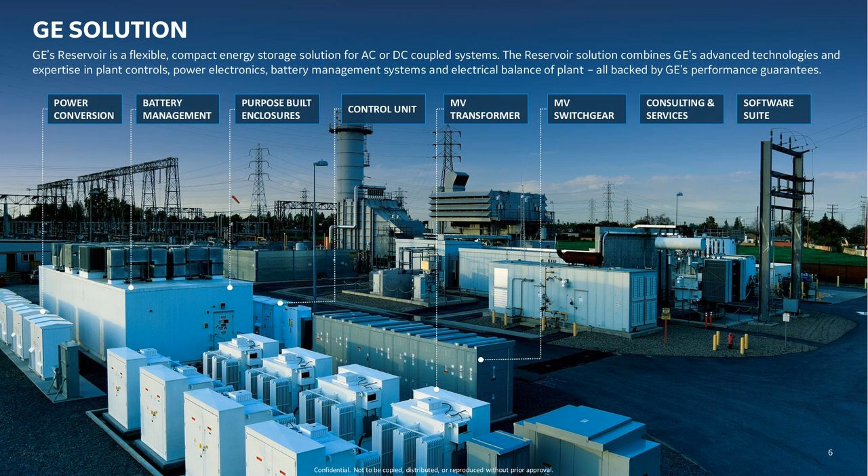And if you go to the next slide, again, not just the hardware, but the whole approach. How do you fit in your particular market? What are some of your challenges? Work with you on a business case to look at the cost benefits of storage or hybridization, planning, turnkey service, and services are all part of the wrap. We try and bring a full solution to any customer who thinks storage or hybridization works for them. And these days, it's hard to find customers who don't realize this is going to be part of the portfolio going forward. And that's very exciting for us.

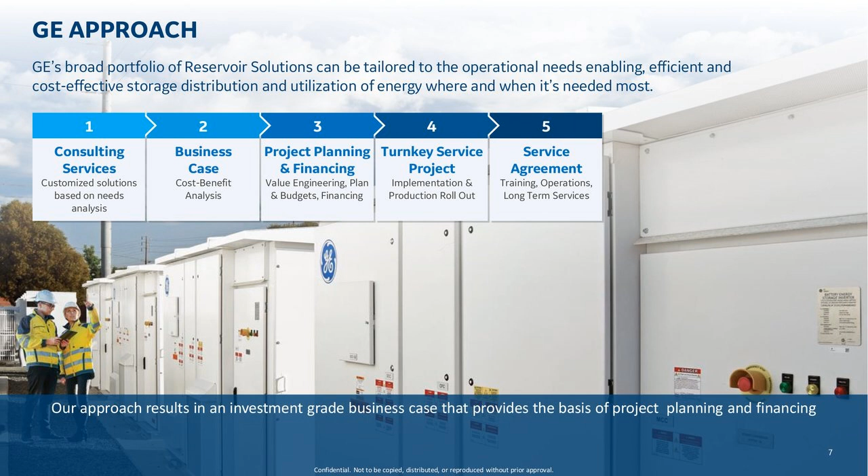Another slide, on slide 10. A lot of us in this business try and forecast what's going to happen. Everything we can see says that what was bought in the last 10 years on the left-hand side, changing to what's going to be bought in the next 10 years, and the slide needs updating a little, but look back, is a dramatic shift.

And everyone who looks at this slide probably has a different impression. My impression, and no offense to anybody who's a coal fan, the 320 on the right-hand side for coal is too high. It's compelling and challenging for those of us in the renewables and storage industry. I don't want anyone to lose their job, but I would love to see coal go down, that we can really impact the use of fossil fuels, that we can make the whole grid a little bit greener. A lot of people say that's a dramatic fall off, and I was surprised the first time I saw this slide. It's not nearly as steep as I thought it would be. And some of the discussion today is around that.

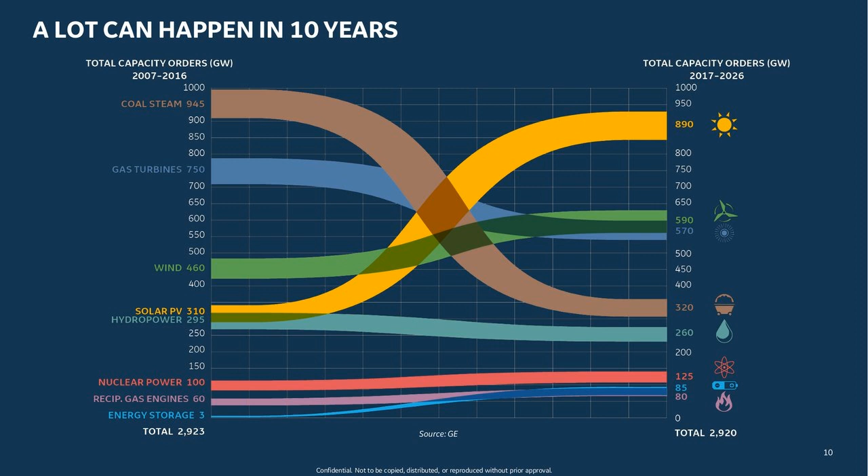So continuing on, again, just emphasizing the rate of change we're in as we decarbonize, as we digitize. We have the opportunity of decentralizing: rooftop solar, et cetera, microgrids, seeing islands not need to import so much diesel anymore, and then electrification. The opportunity is if we can get a very high RPS, the pull to electrify will only accelerate, which will feed back and enable more storage, more renewables, and a greener grid and a greener entire power industry, inclusive of power for transport.

Interestingly, as we model the go forward, and we'll get to this in a couple of slides, GE's models, and sure the models are different here and there, but I think generally we're also not seeing a real tail off in CO2. We see individual states and countries challenged with higher and higher RPS. We're seeing not so much the impact on CO2, and we'll get to that a little bit.

All of this, a little bit motherhood and apple pie, but all this leading to why are renewable hybrids and why are thermal hybrids so interesting. Some might even say, those more adamant about 100% green, no carbon energy, sometimes hybrids, thermal hybrids, gas turbine hybrids can take on a bad name. And I think in the long run, 2050 plus, maybe we move to something that's 100%. But I think there's an aspect of letting the perfect be the enemy of the good, and to bridge to that future environment. So we'll talk about that.

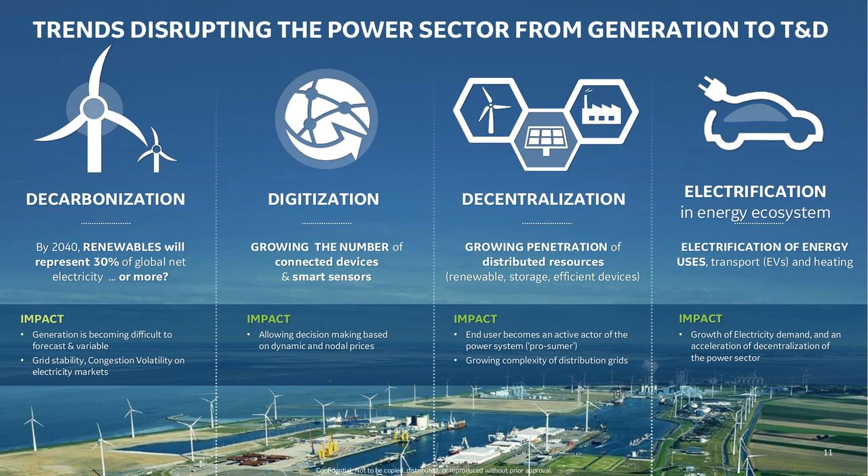That sort of leads into and getting closer to the heart of the matter, and I hope I'm not going either too fast or too slow. But what seems to be a bit of a conundrum as we add renewables, what happens?

And so on slide 13, here's the California duck, the duck that shows up in many areas much more than California. And as we all know, and partly why we're all here, some of the problems with the duck during a day where storage plays: you see obviously what originally was more of a hump in the back as the sun gets hot and we start to turn on our AC at 2 and 3 p.m. inverts, we get the belly of the duck, and classically, if every day was this day, it would be very easy to design storage to pick up the belly of the duck and push it to the neck and up onto the top of the head of the duck, and life would be relatively simple.

But there's problems with that. That is a typical spring day, and I'm going to guess it's a typical sunny spring day. And if you're in California, that's more often than not, but not always. And so beyond the 4 things on the side, we know we have to handle the volatility, the occasional cloud. You've got quick changes, so you've got some shorter duration, minute and hour frequency and ramping. All of these things are well handled by short duration storage.

But you also then run into, in the long term, as we grow RPS, well, that's spring. What about January? What about July? Solar efficiency falls off as it gets hot. Solar efficiency falls off as the sun doesn't get as high in the sky if you're in the northern climes. You get into very different cases of, well, I have a lot of solar and I have a lot of wind, but sometimes I'm going to run out of it because of seasonality or because of extended weather events.

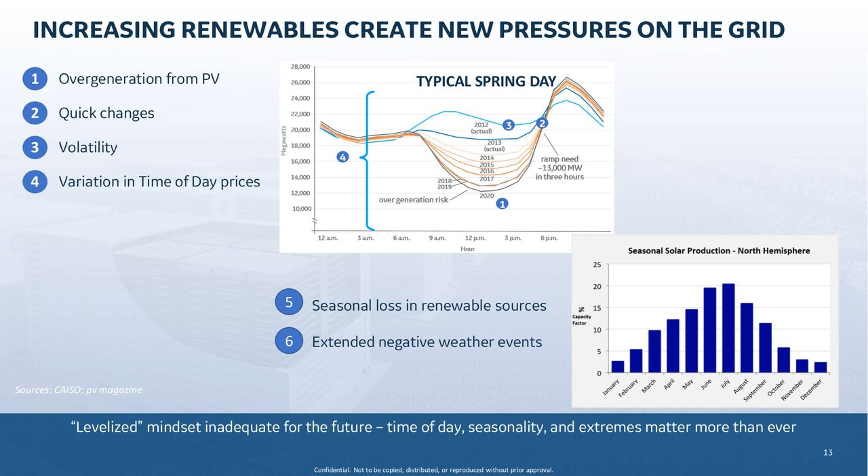Moving on, borrowing a few slides, and I should acknowledge, GE's approach to thermal hybrids has long been in partnership with Wellhead Power Systems based out of California. I'm borrowing some of the information that we've developed together and that they've developed, and we'll talk about the EGT on the aero side coming shortly here, but I do want to acknowledge the heavy intellectual capability they brought to the table here: analysis, insight, engineering capability, and so on. So it's been a great partnership for GE to work alongside Wellhead.

Here we're looking at just some examples, and I'm sure I'm preaching to the choir, but as you bring on variabilities, you bring on wind that can gyrate very quickly as the wind changes. These dots represent change over 10 minutes on the far right here. You go up and down, so wind has a nameplate capacity, but you see that over a year you get an average of 20, 25, 30% of nameplate capacity of wind, maybe a little bit better offshore, but within minutes, within hours, it can change dramatically.

Same thing with solar. Sunny Arizona, 330 days a year, probably very predictable, but even a cloud can take a solar field down 70, 80, 90% very quickly. And so you get a lot of both short-term and long-term seasonality and weather events, all of this playing a game with the grid system that's used to saying, I need this many megawatts, I'll turn this on, I'll leave it on, I know it's not going to change. You get a lot more dynamics.

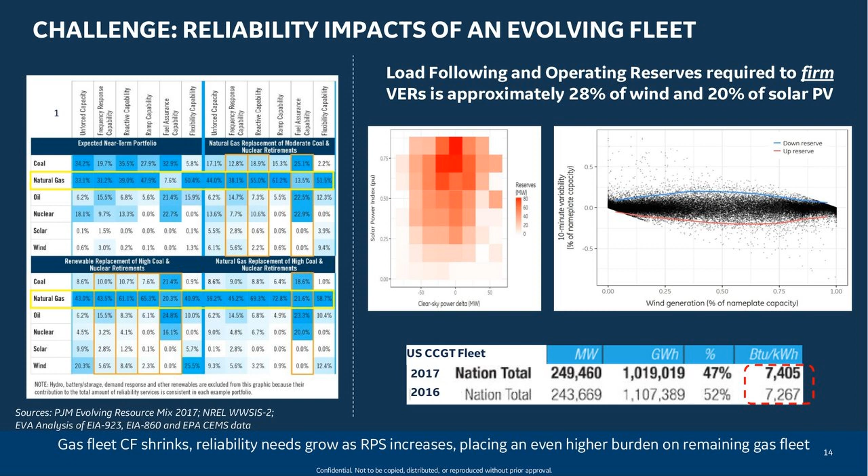If we continue on then to 14, this is a little bit of detailed analysis. You might have seen this if you're neck deep in the ISO regulatory regime. Generically, as I just said, you run renewables, you need more reserves. Many times that's bringing units online at less than full capacity off their design points, more ramping, or more starts. All of that tends to pull back on the greenhouse gas reduction, and you have kind of a dynamic cycle here of targeting higher RPS, but you're dealing with seasonality and the volatility. You sub-optimize your gas fleet, and you actually don't get the greenhouse gas reduction you should.

CAISO, in an analysis they published in January, projected out the growth as they run the RPS, I think 60% in 2030. Excuse me. They actually start to see, not from the accelerated retirement of their gas fleet, and they're very vocal, God love them, they're very vocal about moving to 100%. There's a lot of passion there, and sometimes mentioning even the word gas turbine is fighting words.

But if they only allow their gas-fired assets today to sunset based on a 40-year life, they actually start to run into not so much total capacity capability, but they run into load following and operating reserves to handle how they predict the renewables-based portfolio would impact.

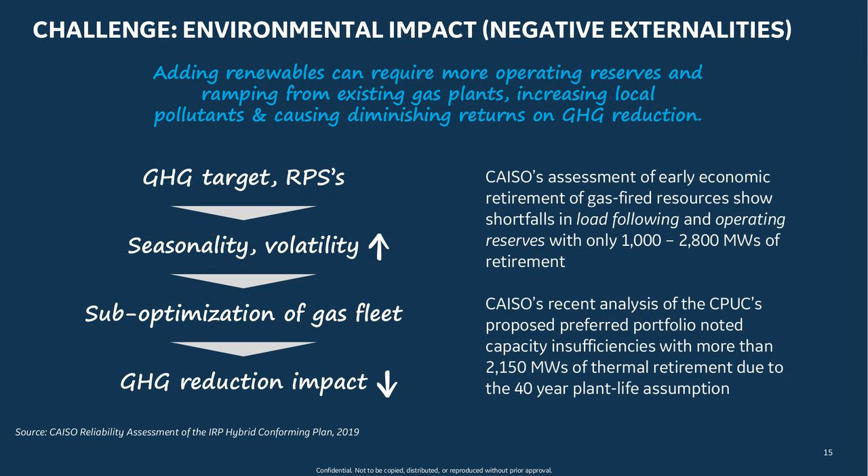And so when these units are called upon to cycle even more, you not only pull back on the greenhouse gas emissions benefit, but you also actually introduce more criteria emissions, NOx, CO, and whatnot. And so you even further undermine the benefit. We need to come up with different ways of approaching that. And that, with no further ado, is where hybrids come in, 17 and now 18.

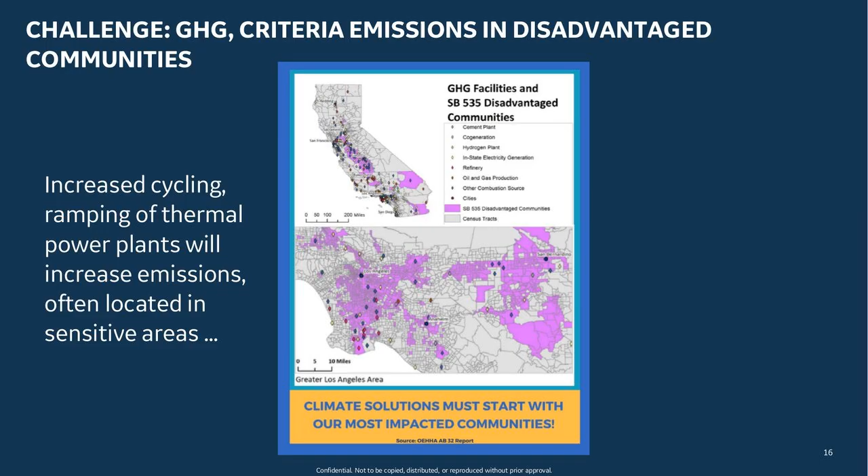And again, credit, Wellhead and GE worked with Gridwell to do this analysis to look at if we hybridize, and we'll get into the details here, but really it means in a behind-the-meter configuration, a relatively small battery with an open cycle turbine, basically an aeroderivative, very fast start, very flexible turbine to begin with, or with a combined cycle gas turbine, and we'll show the benefits of those, but again, not a one-for-one matching of the megawatt, but in the neighborhood of 20%.

In addition to that, you can then start to accelerate the retirement of the other resources. So you get your cake and you get to eat it too, and you actually need less storage. Now, you could turn this slightly in another direction and say, I'll take more storage, I'll take less gas. And that again gives you that capability, because your super flexible hybridized assets are providing the grid ancillary services that you need in quantity as you get RPS 30, 40, 50, 60. And again, this analysis is about a 60% RPS in 2030.

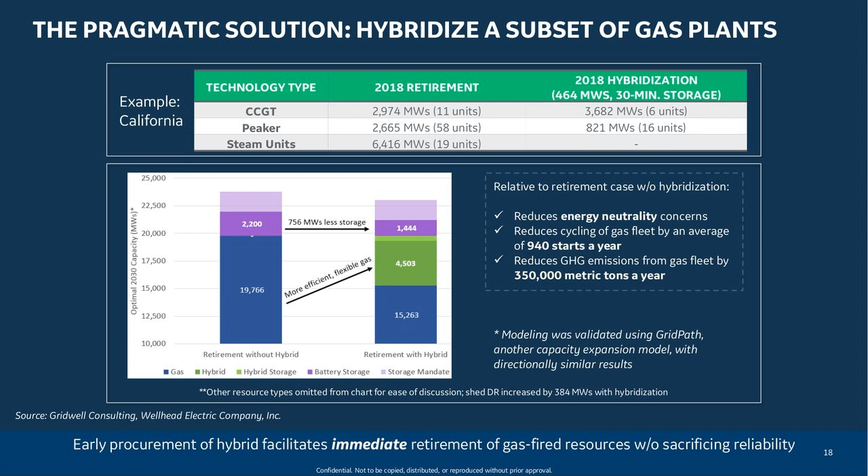very quick to summarize, if we hybridize the existing peakers in these disadvantaged communities, because that's predominantly where they're located, those disadvantaged communities tend to be at critical grid interconnects and ideally located, as opposed to turning them on and off even more, and CAISO was willing to accept. So there's a little bit of communication with people like the CAISO and the PUC to say that asset is actually a spinning reserve asset because it's immediately online, it's synchronized to the grid, it's ready to go. The fact that it's not physically burning anything should be seen as an advantage.

It's not classically spinning. Classically spinning meant metal was spinning. There's no need for that. The battery covers the beginning. We'll get into that in a little bit of detail. So the peakers actually run significantly less, but are there providing spin reserve. Many peakers would start up, hold at minimum power to provide spin, but shut down without ever generating. That's a lot of emissions for no value, no direct value, if you can do that same thing without burning gas.

Complementarily, the hybridization of the current combined cycle gas turbines, which is a little bit of a newer area we're looking at, you increase the ramping capability of the entire resource, and you can pull back the number of units providing that service and either shut those units down if you're California, or use those efficient assets closer to or on their design point, and turn off something else, turn off a coal plant.

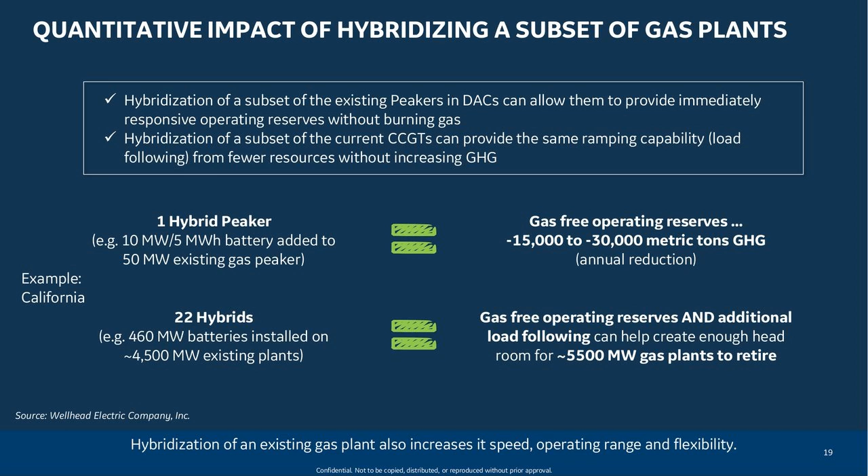So we have to deliver both. We have to deliver reliability, we have to deliver CO2 reduction, criteria emissions reduction, and we have to do it cost effectively. So let's keep going. Finally, we've kind of worked outside in terms of the challenge with renewables and how the benefits are seen, but let's get back down into the weeds. Hopefully your interest is piqued.

And basically that runs the entire plant, that provides spinning reserve or frequency regulation, frequency response, load following, and voltage support. Not necessarily all at the same time, but if we don't get picked up for spin, we can do frequency response. So in effect, this plant that has been hybridized, we'll show a picture of it, two of them in California, is almost always doing something of value to the grid.

Some of the capabilities, and I winnowed this list down because it's such a long list: through not only the adding of the energy storage system, but also optimizing the turbine and the SCR on the back of the turbine, the whole plant is basically capable of sitting at 0 megawatts. It can be off, but even if we turn it on, we can run it at 0 megawatts and hold emissions. Pmax doesn't change. The commitment time is 0. We can have power nearly instantaneously on the grid when the request for spin comes.

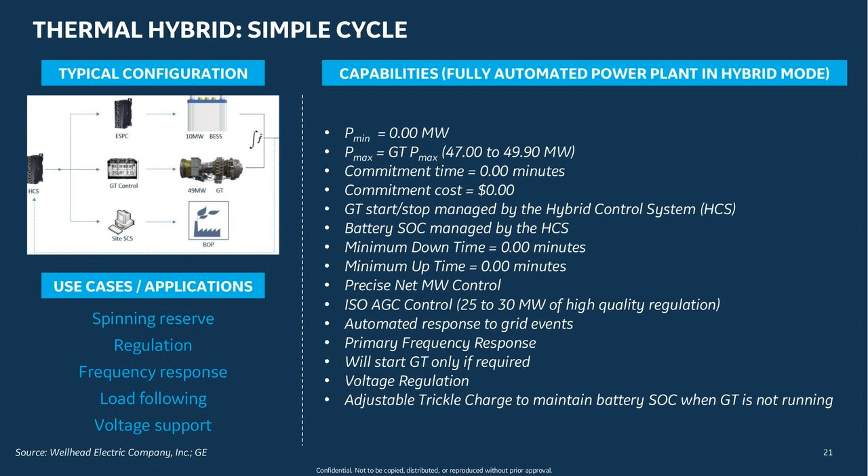It can't be looked at from the grid as being reliable beyond a certain point in time because it's not a generation system. It's simply a bring it in, hold it, bring it back out for a finite period of time, finite amount of energy. But you put them together, and where sometimes you have red and red, then you actually get green. So you get just a synergistic effect from these things that both SoCal Edison and CAISO have really loved about the two sites we have operational in California for a couple of years now.

And you can see very fast. Again, all of this leverages our modular technology, very fast to install. We've learned from the first few applications to bring the cost down, to bring the speed to install up, the repeatability, and really get to be able to do this very quickly. Very low land. It's designed to fit at land-restricted spots. We've actually improved. The picture I showed earlier was actually an older design. We've actually made that very modular, leveraging the reservoir platform, so we can get a small number of containers we can bring in and hybridize a site relatively straightforward.

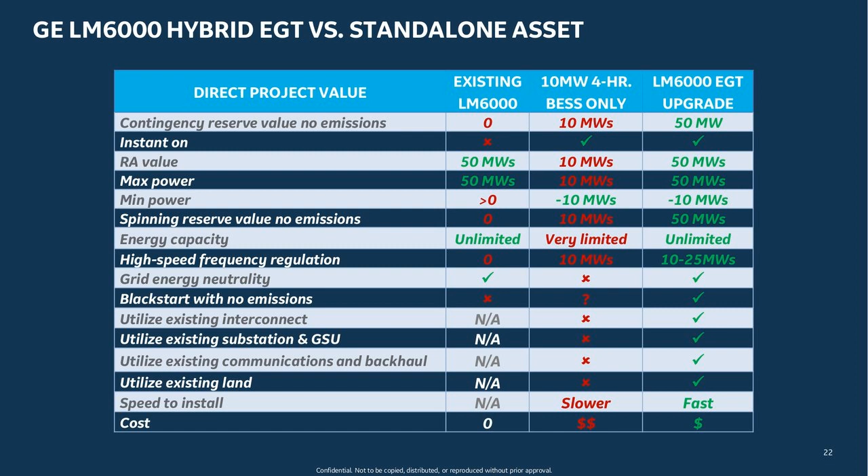So just to go a little bit then from the peaker into the combined cycle, and again here we're not talking about units that are typically offline. You could do a peaker on an open cycle frame turbine. GE offers 10-minute upgrades, so you can get a reasonable peaking benefit, much like the aeroderivative I just showed you. But when you have a combined cycle unit that's online, the gas turbine being reasonably fast, the steam turbine, because of the steam lag cycle, you really don't get as fast a response on that.

We really think that when we're getting the education of the markets that this product is available, we see the uptick in interest. We see slowly tariff structure starting to change. They're starting to get into IRP models and to show the benefits of what a relatively small battery can do to augment a turbine and actually make that turbine's value present, but actually makes its CO2 contributions significantly less.

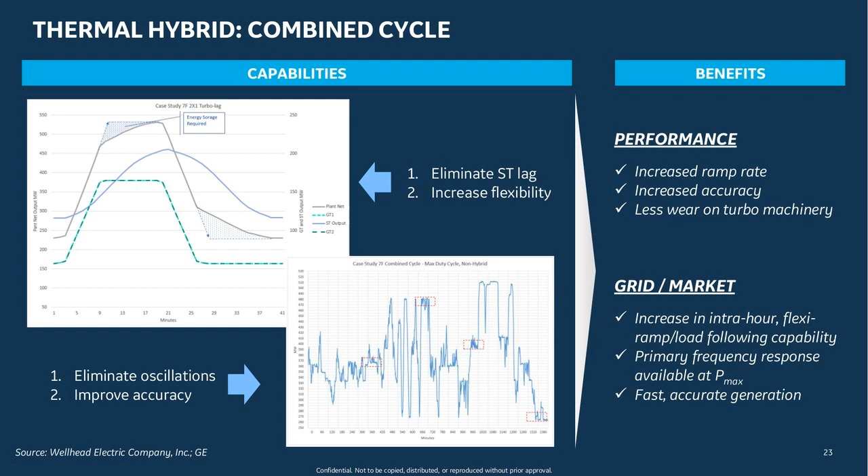Kind of getting into a little bit of wrap up, I'll just cycle through some of the capabilities again, maybe just to drive them home. The challenges of efficient integration of this variable generation. We really don't want to build 90 megawatts of gas for every 100 megawatts of solar we put in. But in effect, I've seen statistics that harsh, that the reliable capacity factor, not on an annualized basis, but in certain periods, is low enough that you end up with that type of build out, and that's just not going to be cost effective.

Flat load growth, so we're not seeing the need. If we put in renewables, we should actually see fossils come out as they naturally retire or get accelerated, but we're seeing that the ancillary services pull forward and the contingency services pull forward and drive more build. That's contingency. Reduce emissions, again, that conundrum: we see fossil plants may actually be increasing emissions because of the compensation they're doing to the grid. More starts, more spin, and that can be pulling full throttle combined cycles back to 80 or 90%, and that's high efficiency that's wasted if we have to turn on something else, an older open cycle turbine, for example.

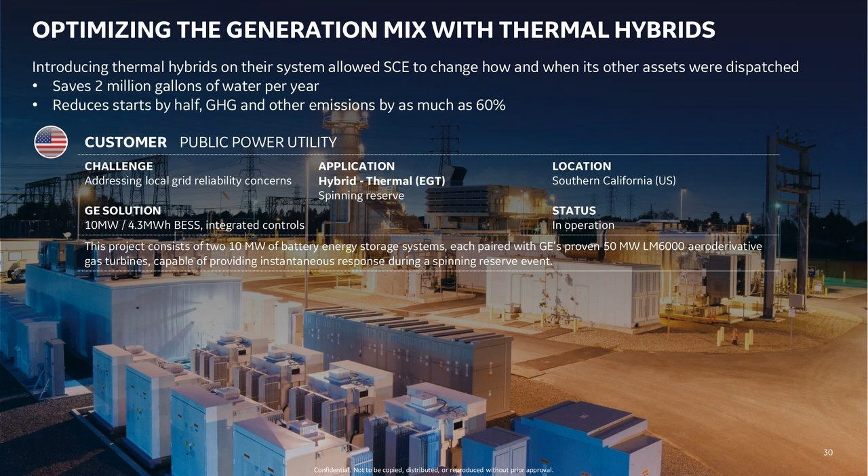Realizing we're maybe a little bit redundant here, but again, 50 megawatts of spin reserve for contingency. That's gas-free until you know you need it, and then you commit it. 25 megawatts up/down of high-speed regulation, voltage support. It's all integrated. It's all transparent to the ISO.

Again, for those who have been in some of these conversations, convincing an ISO that they should just consider this as a super capable turbine is actually a bit of a challenge. There's a tendency to want to control. So we work very hard to show that you don't need to worry about it. It's a very small battery. It's really just a super turbine. Reduced thermal stress and zero fuel emissions, doing all these cases.

This is available online if you want to investigate a little bit further. It's interactive, and so you can dig a little bit deeper and see a little bit more of what the system does. Just some quotes. You don't have to take it from me.

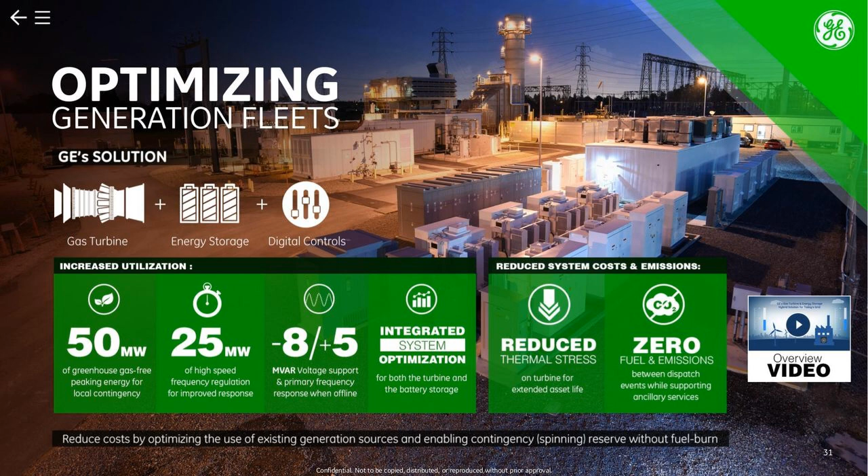CAISO, looking at what they need, and I hope this sort of reflects. You can read it, but they'd like to see more things like this. And so there's a lot of work going on to continue to supply the information they need so that they can get to the RPS they need without taking on a tremendous cost and potentially not even making it.

The other application is the Imperial Irrigation District, that not only provides grid services but also provides black start support for a frame turbine. And those weren't necessarily done all at the onset. I think we added the black start capability a little bit later. And so the key with these hybrids is you never really even know all the examples that you can use with them. And again, in this case, it's a high power system, low energy.

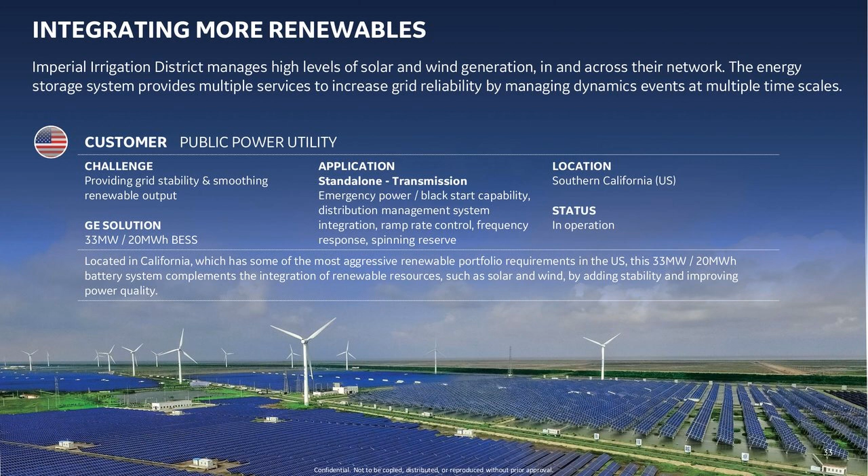So again, I'll just conclude with next steps, and then we'll certainly open for questions. I feel like I've talked to myself for the last 40 minutes, but a lot of benefits beyond the plant, benefits in communities, benefit in GHG and criteria emissions, local resource adequacy, incredible flexibility gained from a very small adder of a relatively small battery compared to the system, and yet you can actually burn less fuel, get more out of that system by having that battery instead of running the turbine just to have it in reserve, and very, very cost competitive.

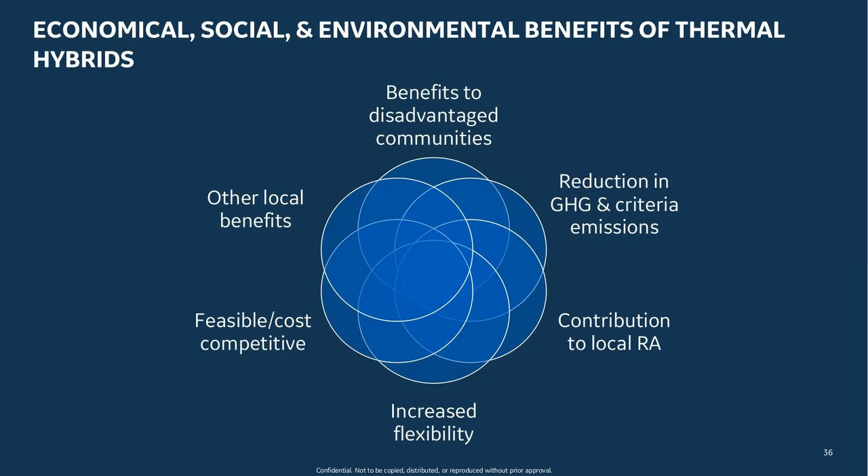As we add storage down the road, you can envision that for the contingency events, the seasonality, and the dark doldrums that I think will get very popular here, where we don't have the sunlight and we don't have the wind, that's going to be the real barrier ultimately. If we've hung on to a reasonable slate of high efficiency combined cycle gas turbines, and we're speaking here 2030, 2040, 2050, 2060 maybe, depending on where you live, and we generate renewable natural gas, we generate hydrogen, we take excess curtailment, which to some extent is inevitable, and we use that to produce RNG or more likely hydrogen, or however the economics work out.

We can then feed that back and run even more clean and maybe potentially perfectly clean combined cycle turbines at high efficiency, in which they only need to manage the average load, and they feed the storage systems that would normally have been fed by renewables. They're now fed by a replacement system of energy, where it's not renewables, now it's baseload gas turbines, and that energy is actually shaped by the turbines.

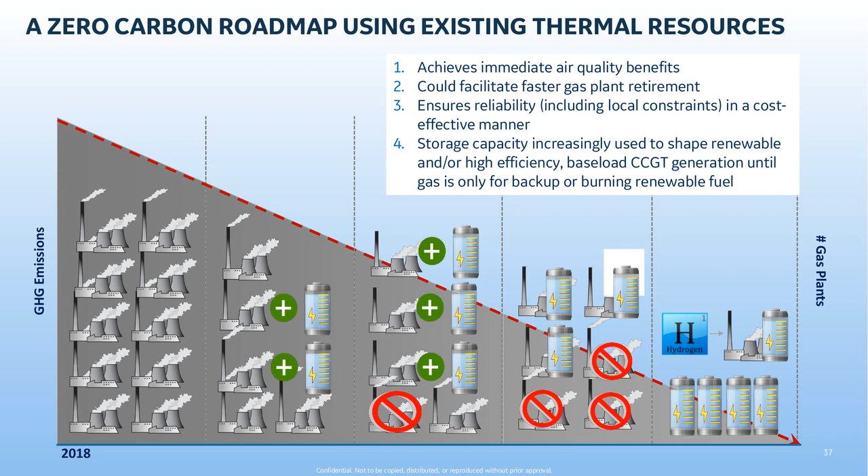So I leave you with a cartoon, two cartoons. So this is the second one on slide 37. We're really just trying to paint a picture to show that when you add storage and hybrids and you increase the value but lessen the impact of gas turbines ultimately, they then become, in the long run, as storage increases, storage gets cheaper, they become the backbone until we develop longer term, very, very cost-effective long-term storage, which I'm sure we're going to see a lot of that in conceptual form at ESA.

They become a very effective way to get very high RPS and hold some assets back, not to the peak demand, but to the average demand, less the reliable renewable capabilities. Then they can generate their energy, shape that with storage, and you can have RPS. You know, I don't have the great models yet. It's another thing on my plate. But you can have RPS well above 60, 70, 80% when you have a backbone of clean combined cycle working with your storage, so you don't have to have a lot of peaking and a lot of excess assets that have very low capacity factors.

So covered a lot of ground. I hope that's been helpful. Tom, I would open it back up to you for questions. I guess I ran a little over, but hopefully that was beneficial.